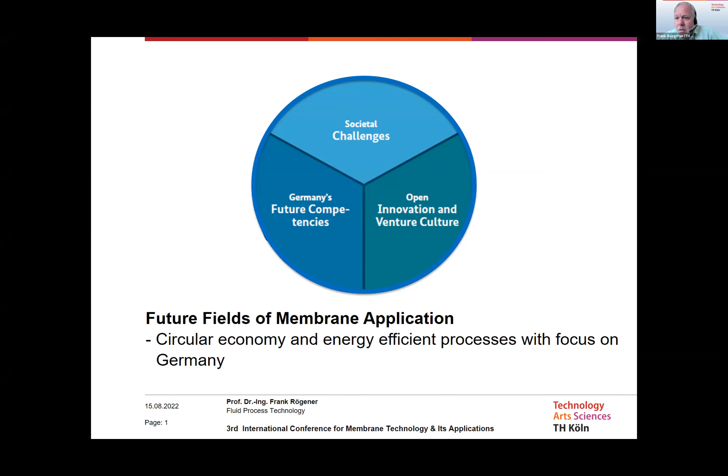So welcome to my presentation on future fields of membrane application. As you may know, this is a broad field. Therefore, I will be focusing especially on circular economy and energy efficiency in processes, with focus on the German situation. In Germany, we have some societal issues that may be a little bit different from Egypt.

One of them is closely related to the demographic change. Other problems are related to the limited resources and the intended independence of suppliers of these materials and raw materials. And another point is energy efficiency. So I can sum up that we have to change our way of life, and membranes can contribute to this change in society and in the industry.

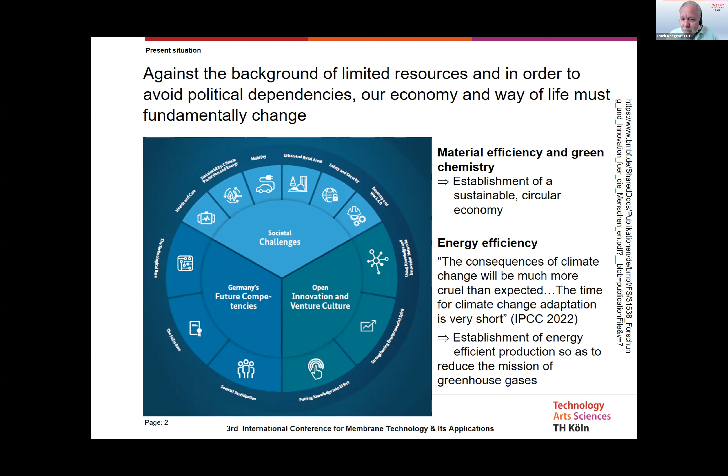The main objectives that I will be showing here are material efficiency and green chemistry, so as to establish a sustainable and circular economy, which is part of our legal system nowadays. The other point is energy efficiency, related to the supply and generation of energy. We have the problem of the emission of greenhouse gases, so we also need to focus on these points.

So also here in Germany, we feel the effects of climate change, and we must address these problems that are not only related to the industry, which now does not receive enough cooling water. It's also a problem concerning the transportation ways, because a lot of goods are transported on the River Rhine, and certainly it's also concerning the supply of the people with drinking water.

At first, I would like to give an overview of the applications of membrane technologies that have a close connection to our societal problems. Especially when it comes to application, we talk about sustainable water. Which alternatives do we have for more efficient water treatment? How can we find alternative water sources and bring them to the appropriate characteristics of drinking water? We are talking about sustainable chemistry, sustainable food technology, biotechnology, biopharma, chempharma. And especially we are talking about energy storage and conversion with the help of membranes.

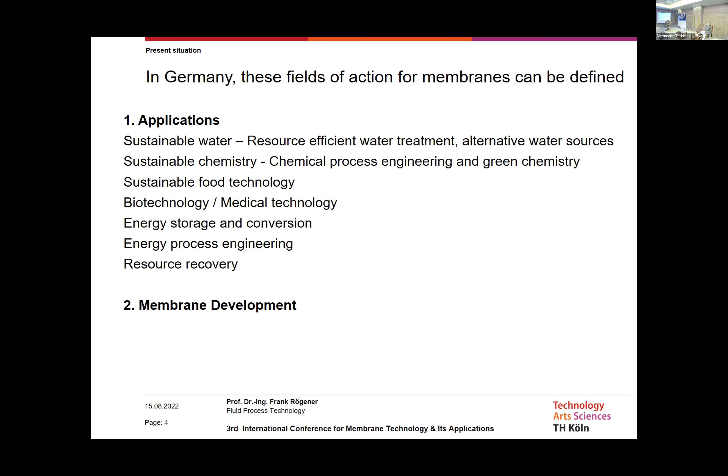Another aspect is certainly also the development of new membranes. You're the experts in membrane development. I'm only a guy who uses membranes and tries to get the best out of these membranes. So the question of membrane development is unfortunately not my field.

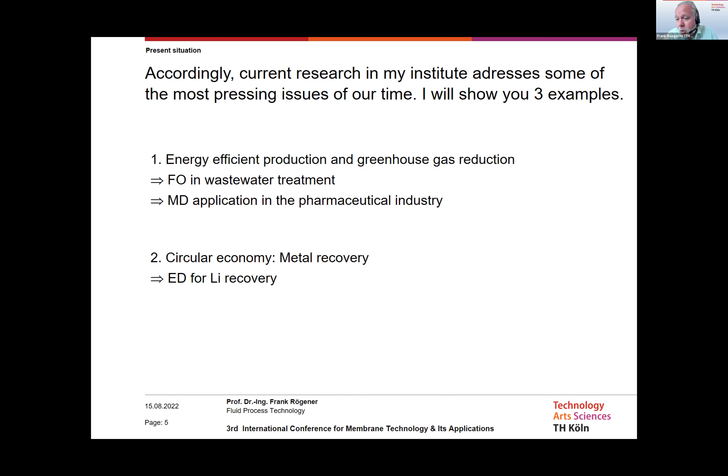Because the time is restricted, what I want to show you is three examples coming from my institute. Two of the examples focus on energy efficient production and the reduction of greenhouse gases: first, forward osmosis in wastewater treatment, and second, membrane distillation in an application in the pharmaceutical industry. The third example will be concerning circular economy and the recovery of lithium from waste products.

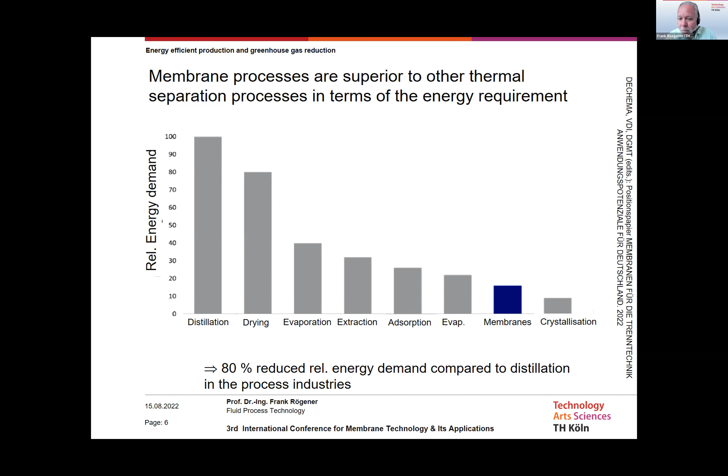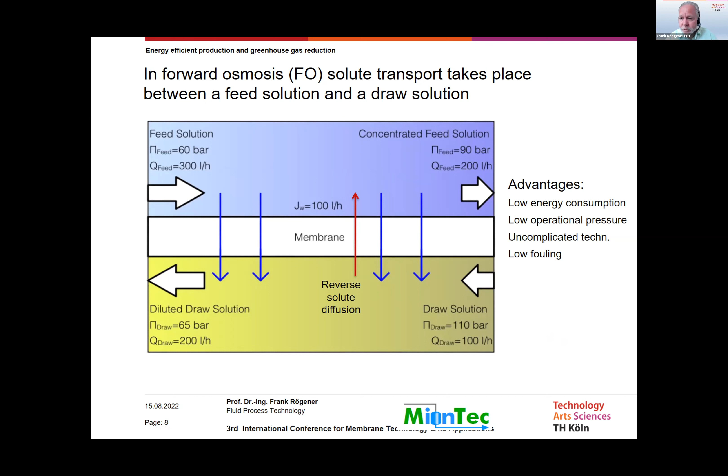Well, afterwards we have to work also on the regeneration of the draw solution, but well, the forward osmosis as a process is a low energy process because it works more or less at a very small pressure below 1 bar. We have rather uncomplicated technology, and from the idea we also have a lower fouling, but you know, every kind of membrane process, every kind of separation process suffers from fouling.

Well, one of the focusing points for the development is the draw solution that should be found for each and every application. So we have different demands on this draw solution. That's water solubility, for instance, that's the osmotic pressure. It's the viscosity that influences also the operating costs, and it's other characteristics such as a cheap solution. The solution should not be poisonous, and it should be easy to recover. So not necessarily with the help of reverse osmosis, but with any other kind of separation technology.

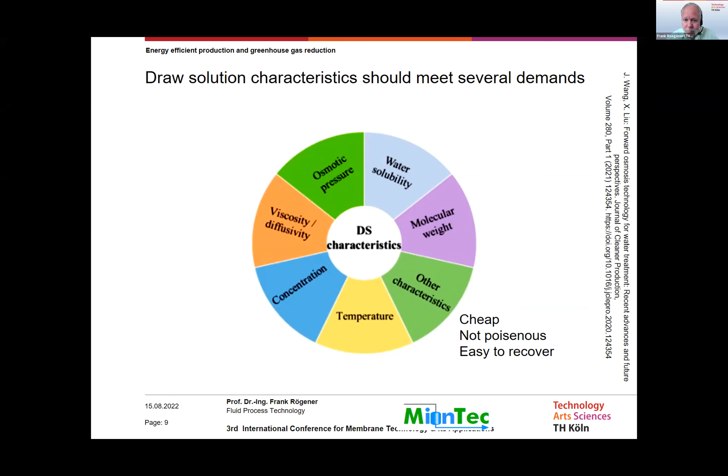So, and what we did in our institute together with the company MionTec, where a PhD student is now working. So they tried to use the so-called aquaporin membrane. So that's a bio-based material that allows a specific water transport through the membrane. And he tested several draw solutions based on inorganic salts.

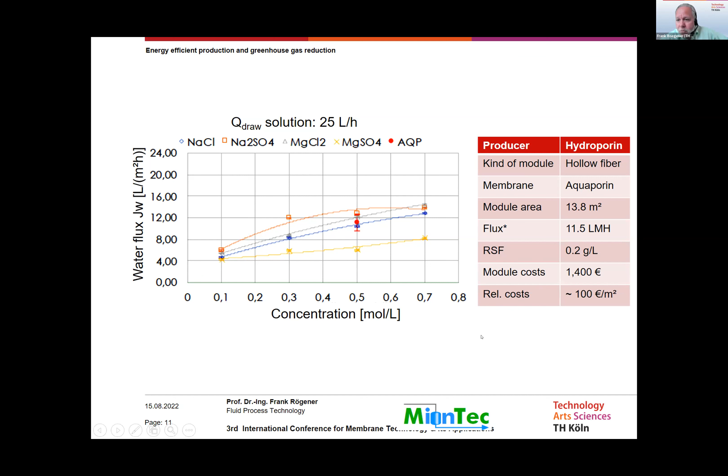So next thing is membrane distillation. So we conducted several experiments together with two companies. So DEUKUM provided the respective modules. I can show you on the next slide the type of module. And the company Werner is a company that is closely related to the production of pharmaceutical grade water. So the idea was to find alternatives to the technologies that are now being used, that's reverse osmosis and distillation, and both of them have a rather high energy demand.

And the question was, can't we use also membrane distillation, which has a smaller energy demand, for the production of pharmaceutical waters? So in pharmaceutical industry, we distinguish between two kinds of waters. The first thing is the so-called purified water, and the other solution that has a higher demand on the quality is water for injection. So that's, for instance, used for any kinds of solutions that are in direct contact with the human body.

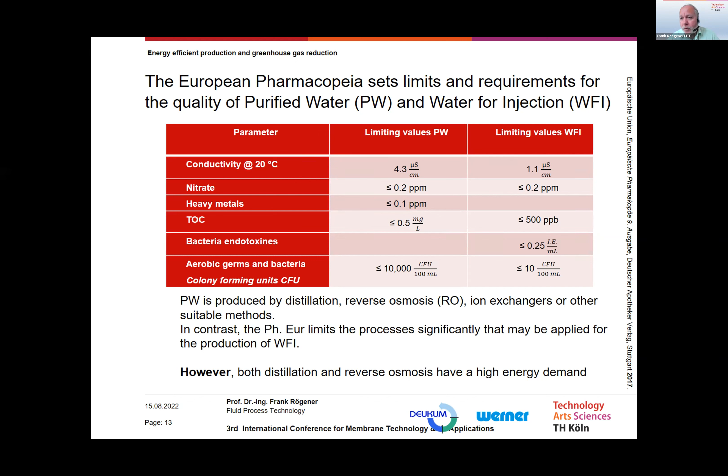And if you want to use other technologies, so then you have to pass a specific process that shows that this new technology is able to provide also the same quality under given conditions for a long time without any impairment of the hygienic quality.

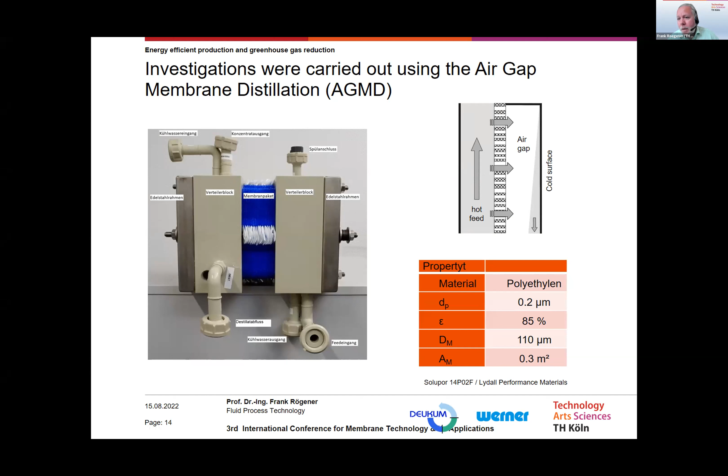And after the air gap, there's a cold surface where the condensation of the respective steam takes place. Well, the material was polyethylene that we have used here, and we have used in this case for the tests an artificial heating of the hot feed. But for real life applications, the higher temperature could be provided by waste energy, and this makes the technology so interesting.

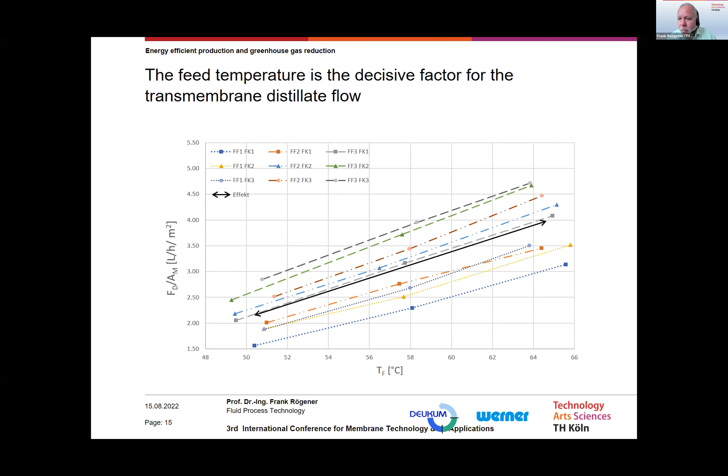Well, and here I give you two examples of results of our experiments. So here this is showing the transmembrane distillate flux. The black line in the middle shows the average value indicating the effect of the feed temperature. The cooling water was tap water, so a temperature of 20 degrees. And we used different temperatures of the feed solutions. And you can see the higher the feed solution, the better certainly is the performance concerning the distillate flux.

On the other hand, we also tested some other parameters that are quite normal for testing in membrane technology. So that's the cross-flow velocity. In this case, we could see that until a given point, the cross-flow velocity leads directly to a higher flux. But at a given situation, higher cross-flow velocity does not provide any more advantages. That's shown in the respective graphs here in the upper part. So that means there's a limit of the optimum cross-flow velocity for the operation.

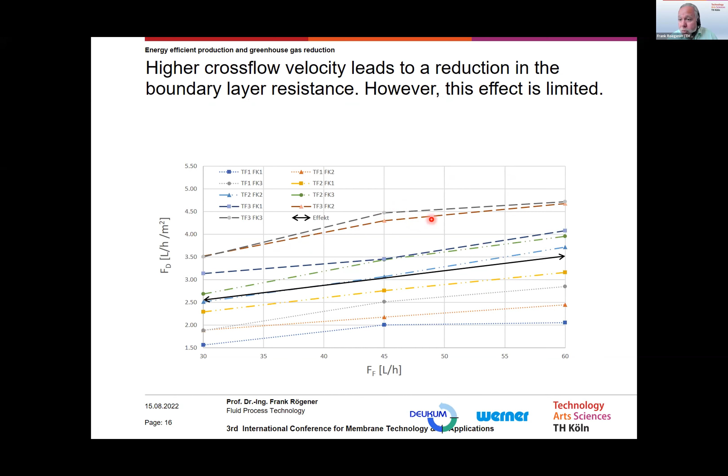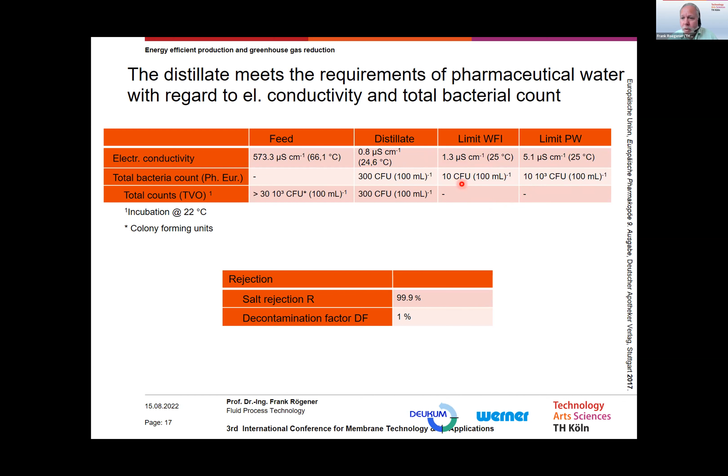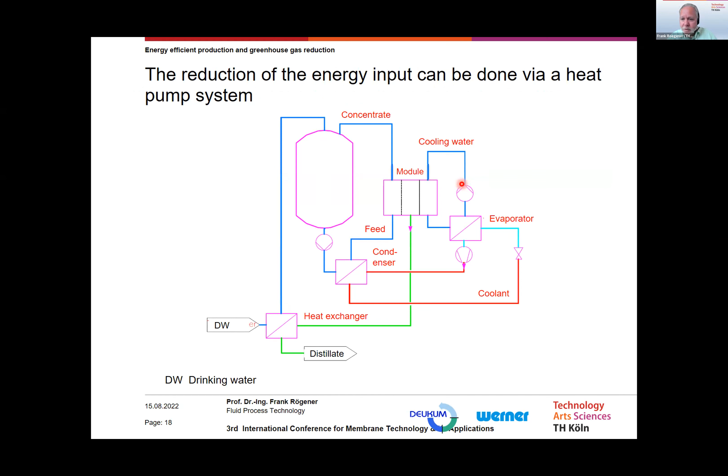For the higher grade water for injection, unfortunately, we exceeded the respective values. The electric conductivity was more or less okay, but concerning the bacteria counts, we only achieved a little bit higher values. So in principle, we could show membrane distillation is able to provide good quality. And the next step would now be to optimize the energy demand. So here was also the idea from our student to use a heat pump system, so as to lower the energy demand of this whole process cycle.

So 2 minutes, please. Give me 1 more minute.

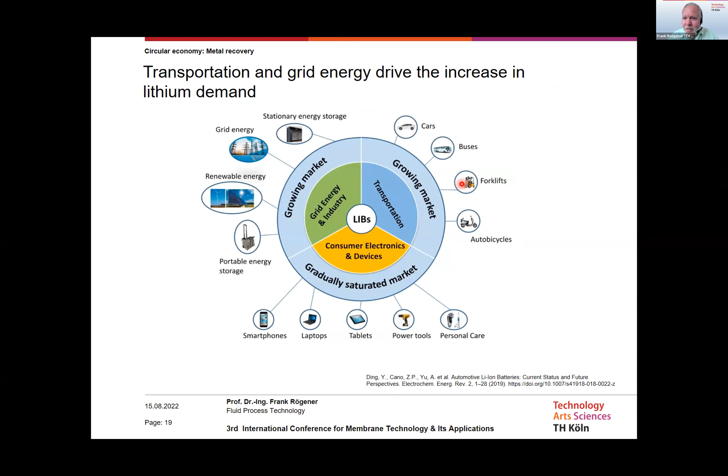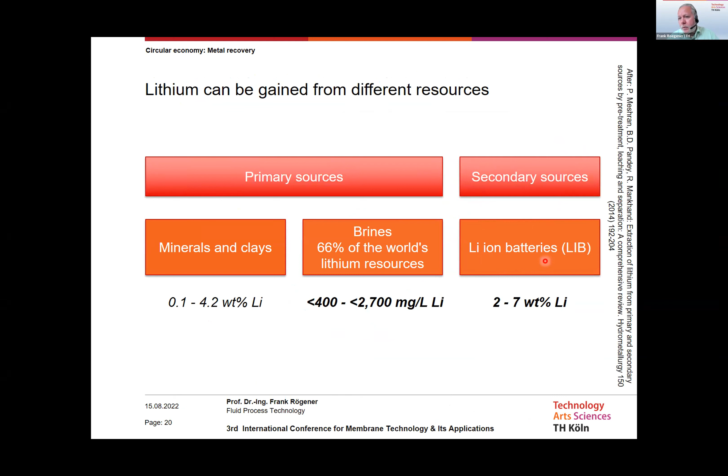So last thing is the recovery of lithium containing solutions. We are thinking in Germany of secondary sources now. That means lithium coming from lithium ion batteries. So we collect them, shred them, and try to extract the lithium from this waste product. And when it is available in a liquid form, we could, for instance, use electrodialysis for the recovery.

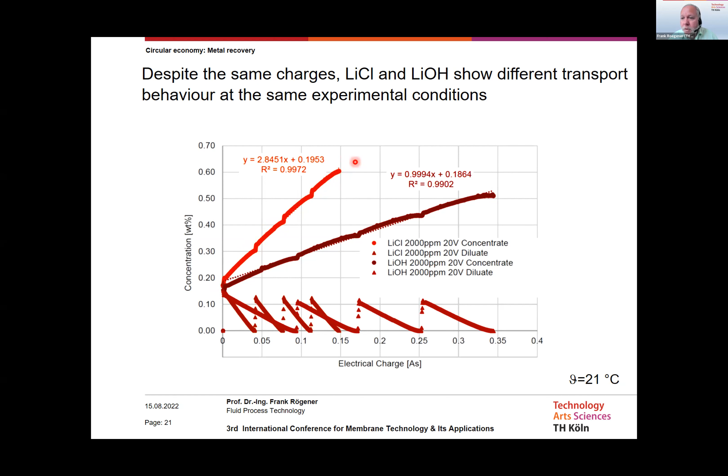And these graphs show the performance. We can see that here the orange curve shows the behavior of lithium chloride, and the brown curve shows the behavior for the concentration of lithium hydroxide. And as we can see here, the respective process and the overconcentration would be much faster if we transfer the lithium into lithium chloride, because of the stronger slope that we can achieve with this kind of solution.

So conclusions that I can draw is that against the background of the global situation and the demands of the German society, membrane technology is fitting quite well into these aims, because many of the technologies have either already proved their ability, or experiments have shown that they have the ability to provide good industrial solutions. But on the other hand, we have talked about circular economy. We also have to check the possibility to recover the membranes and to produce membranes out of materials that have a lower impact on the environment.

So the way is not over. There's a lot of work to be done, especially focusing on the aspects of membrane production.